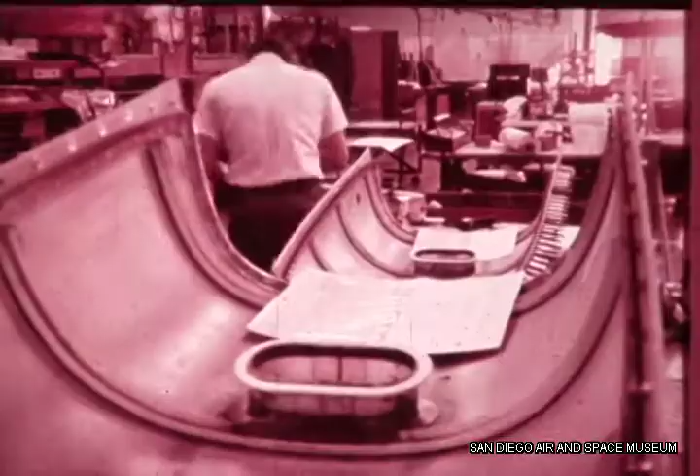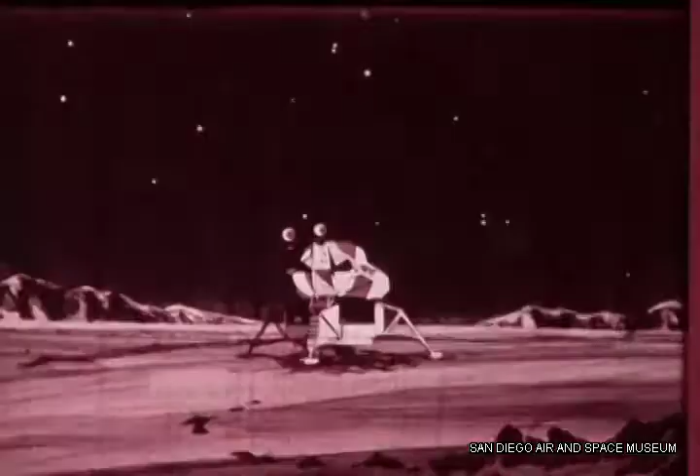Teledyne Ryan Aeronautical is a company of products, a company of aerospace firsts, Teledyne Ryan Aeronautical, a company of capability.

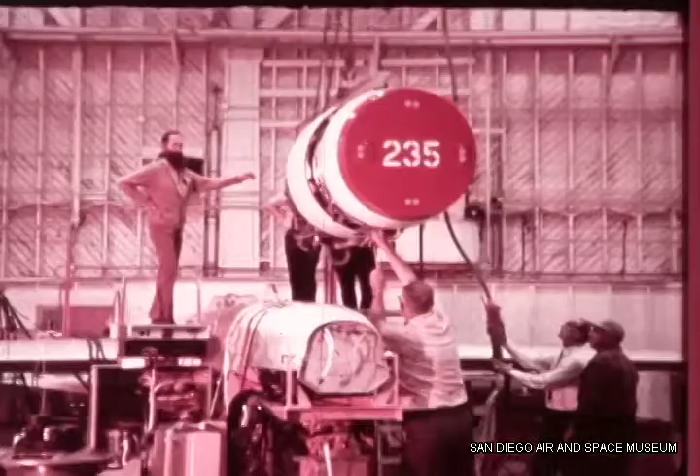The Teledyne Ryan Aeronautical main plant, located on a 44-acre site adjacent to San Diego International Airport, is headquarters for aeronautical engineering and design, with adjoining production facilities for prime or subcontract aerospace manufacturing.

In the early 20s, flight was still in its infancy when T. Claude Ryan founded the Ryan Aeronautical Company and later accepted the challenge of building Charles Lindbergh's Spirit of St. Louis, a great technological achievement in its day.

Throughout the following half-century of aerospace progress, Ryan became known for many firsts in the industry, such as vertical takeoff and landing jet aircraft, pilotless jet targets, and remotely piloted vehicles. In 1969, the company became Teledyne Ryan Aeronautical, a wholly owned subsidiary of Teledyne Industries of Los Angeles, California.

Teledyne Ryan's acknowledged leadership in unmanned aircraft technology was established more than 30 years ago with the Firebee-1 subsonic jet target. Firebee has proven itself to be a highly reliable aerial target for training the personnel of the free world's armed services and testing the sophisticated air-to-air and surface-to-air defensive equipment they man.

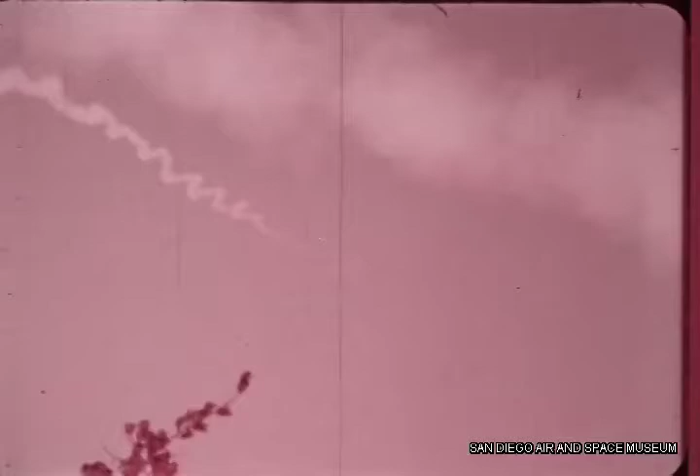To date, more than 6,000 Firebees have flown over 30,000 missions, with a mission reliability factor in excess of 92%. Firebee's performance envelope includes a maximum speed of Mach 0.97 in level flight, altitudes in excess of 18,000 meters, and a maximum endurance mark of nearly 2 hours in its standard configuration.

The target can be launched from sea or land-based stationary and mobile zero-length launchers. Firebee can also be air-launched for greater flexibility in conducting remote testing or training activities.

Firebee's highly modular design allows it to be adapted to a variety of missions, or to provide a wide spectrum of realistic target simulation through radar augmentation, chaff dispensing, and infrared augmentation.

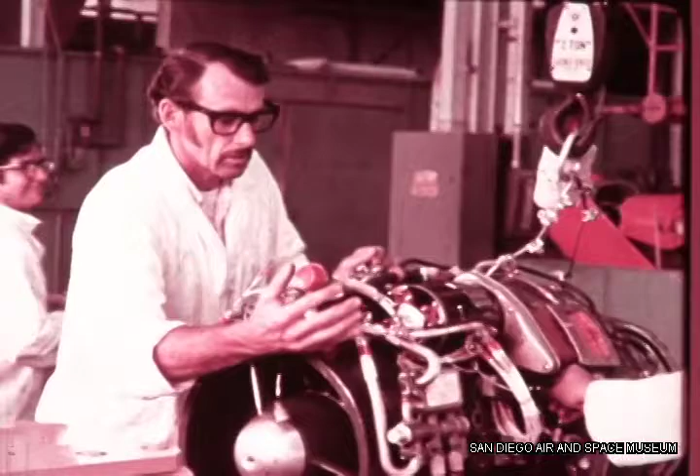The basic design has undergone various aerodynamic and structural modifications for up to an 8G turn capability. Although originally designed with a J69 engine, Firebee's performance capabilities have been enhanced by modifications that accommodate the more powerful J85 as well as other potential engine options.

Supersonic threat simulation approaching Mach 2 is the role of Firebee-2, the first of Teledyne Ryan's supersonic target vehicles. Longer, leaner, shorter winged than its predecessors, this high-performance jet target attains speeds, altitudes, and G maneuvers that put present-day weapon systems to the test.

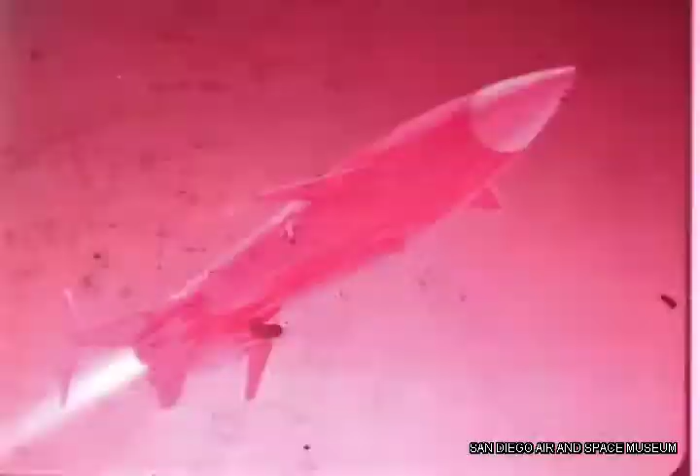The third member of Teledyne Ryan's supersonic target family is the Firebolt, which is being developed under prime contract for the Air Force's high-altitude, high-speed target program. Firebolt's small size, just over 5 meters in length, facilitates air launch from standard fighter aircraft.

Carried on the center store position of an F-4 Phantom, the Firebolt drops away at a typical mission launch speed of Mach 1.5 at 15,000 meters.

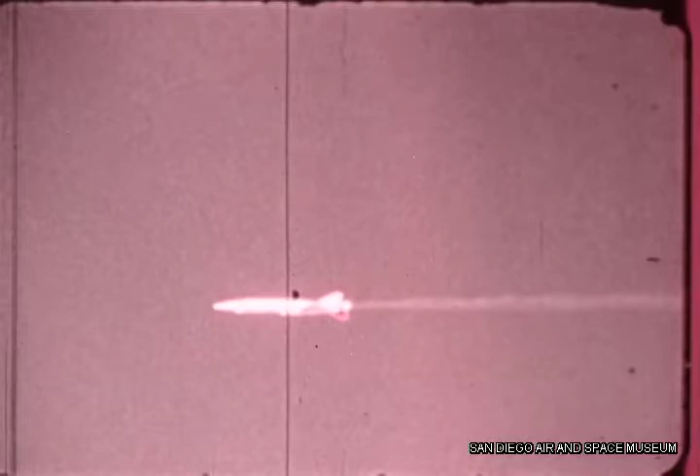An onboard automatic flight control system provides a highly maneuverable and versatile flight program, including constant Mach number and altitude cruise, constant G 180-degree and S-turns, as well as climbs and dives.

Firebolt's extraordinary performance, including speeds up to Mach 4 and operational ceiling of over 30,000 meters, provides a realistic replication of aircraft and missile threats for decades to come.

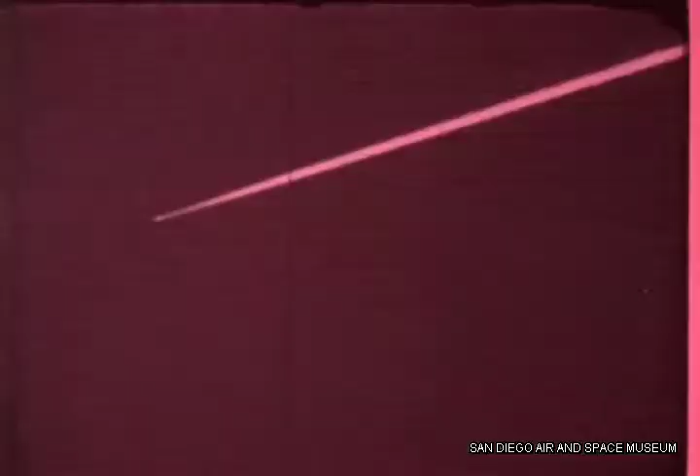With Firebee-1, Firebee-2, Firebrand, and Firebolt, Teledyne Ryan will be able to provide target vehicles that match the performance capabilities of any known airborne threat into the next century.

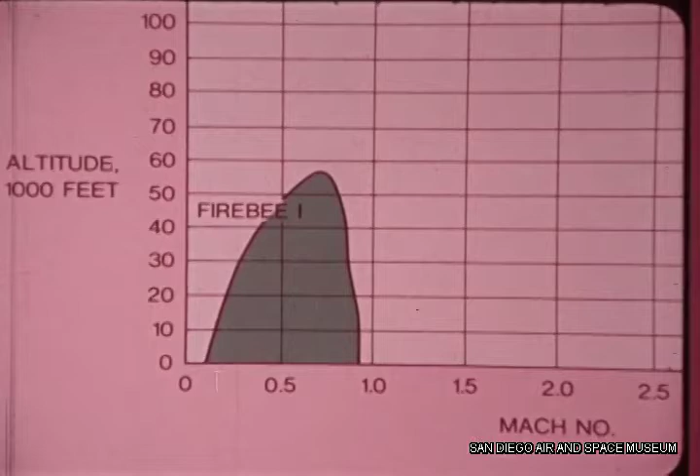Overlapping speed-altitude envelopes illustrate the wide range of these parameters, which will extend from subsonic flight at very low altitudes through the supersonic region at extremely high altitudes.

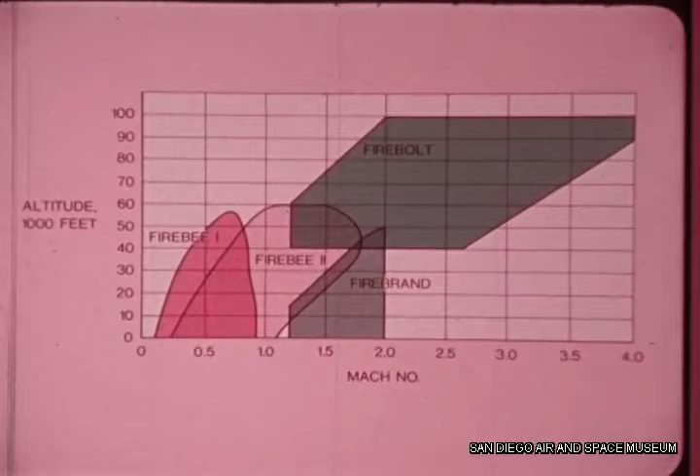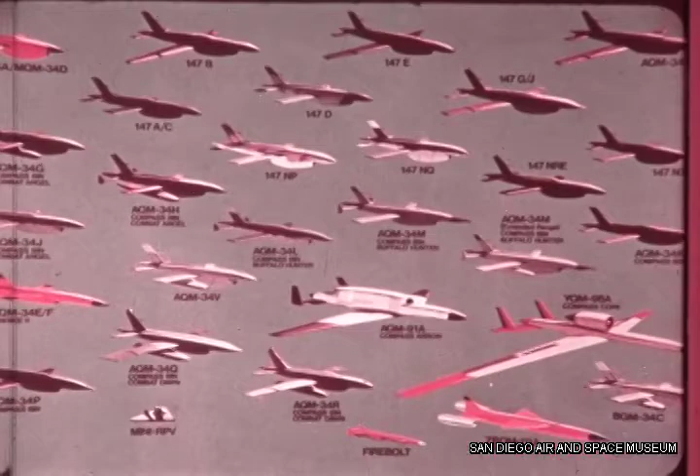In addition to its long history of jet target development, Teledyne Ryan has also designed and manufactured an entire family of remotely piloted vehicles, or RPVs. These robot aircraft are employed where conditions such as a hostile environment, very low or high altitude, or long endurance flight would be too expensive or too hazardous to include humans.

Since the early 1960s, over 900 RPVs in 30 different configurations have been developed to fulfill three basic mission requirements: photo reconnaissance in both day and night and at high or low altitudes, electronic countermeasures, including both passive and active systems, and radar and communication signal intelligence gathering.

These RPVs have also demonstrated the possibility of strike missions with the on-target delivery of the SPASM self-propelled air-to-surface munition, the stubby Hobos television-guided glide bomb, and Maverick television-guided missile.

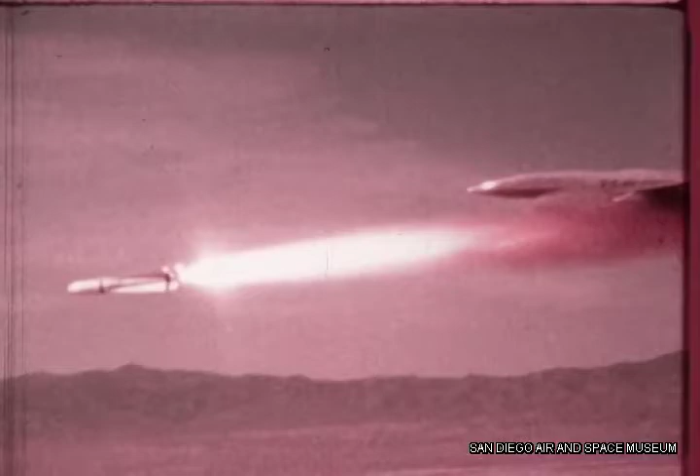Launched in the same manner as aerial targets and recovered by parachute with an airbag impact attenuation system, or retrieved in midair by helicopter, these RPVs provide the tactical commander with a versatile and flexible system that will allow him to dispatch a vehicle at short notice from almost anywhere.

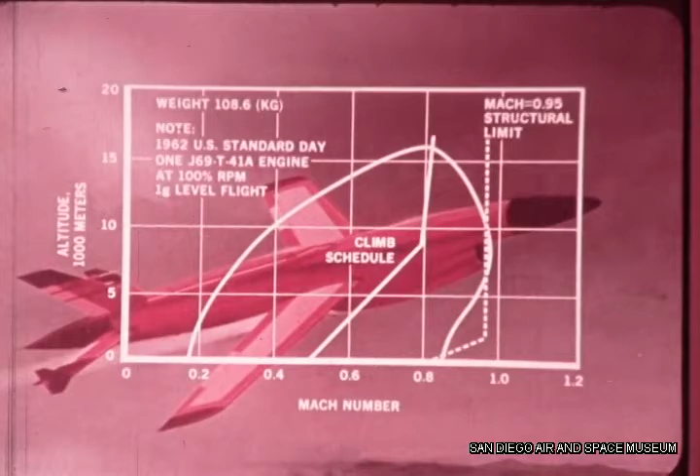The 124R is typical of the Teledyne Ryan RPVs, designed for photo reconnaissance at both low and medium altitudes under hostile conditions. Capable of flight as low as 50 meters and speeds up to Mach 0.95, the 124R has the maneuverability necessary to penetrate enemy defenses and the reliability to achieve its mission objectives consistently. Operating ranges extend from 800 kilometers at extremely low altitude to 3,000 kilometers on a maximum range mission. Interchangeable nose configurations can accommodate various high-resolution camera systems for low or medium altitude photo reconnaissance missions.

A prime example of Teledyne Ryan's design, engineering, and development ability is Compass Cope, an advanced state-of-the-art high-altitude, long-endurance RPV capable of runway takeoff and landing, either manually or automatically under onboard computer control by following tactical landing radar beam and radar altimeter data. It set the unofficial endurance record for RPVs in 1974, when it remained airborne for over 24 hours.

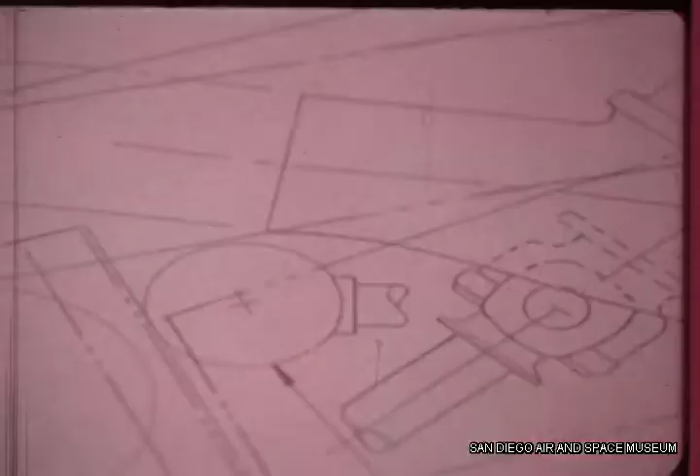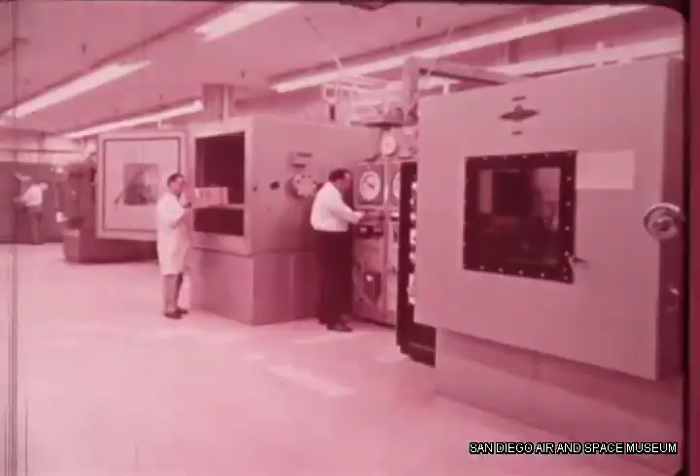Teledyne Ryan is well equipped to develop the next generation of RPVs with emerging mission requirements of speed, low and high altitude, short and long duration for both one-way and reusable systems. The company's staff of research, application, and design engineers are skilled and experienced in low and high altitude, subsonic and supersonic aerodynamics, propulsion, structure designs, and avionics integration, and are complemented by the necessary computer facilities, engineering test laboratories, and flight test and operational support expertise.

Their talent has been utilized on many programs to perform engineering studies, such as the development of flight control laws for the NASA HIMAT program through advanced flight control simulation, a kind of wind tunnel in the sky approach.

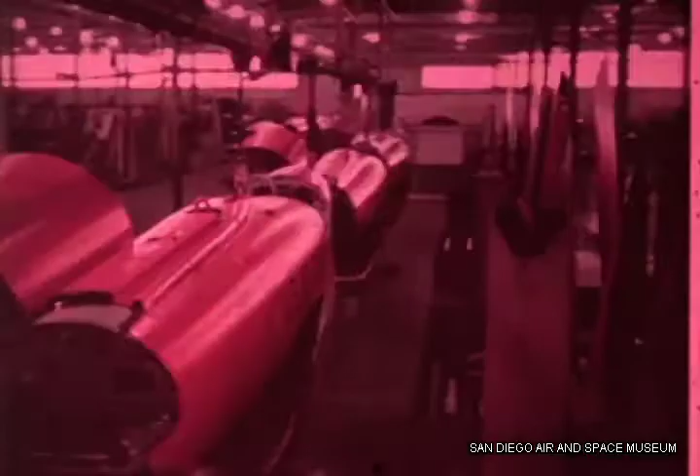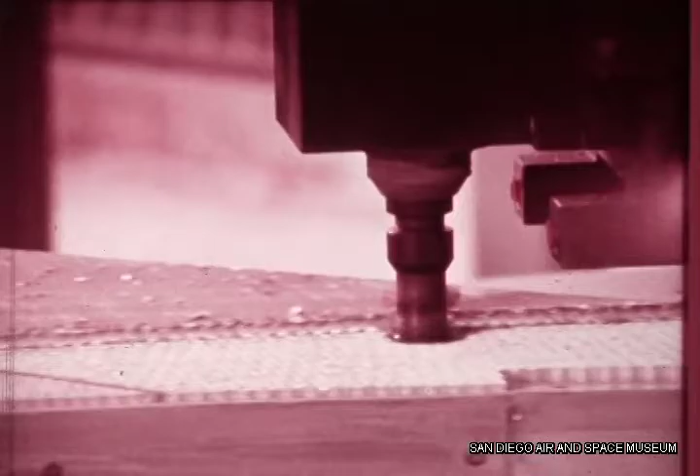The technologies of flight dynamics and simulation developed for the evaluation of such programs, Teledyne Ryan's role as an aeronautical manufacturer is a matter of record. Over the years, thousands of jet target aircraft and RPVs have been produced, and during its history, Teledyne Ryan has also been a subcontractor to each of the major airframe manufacturers, producing assemblies and components for aircraft such as Northrop's F-5 series and F-18 Hornet.

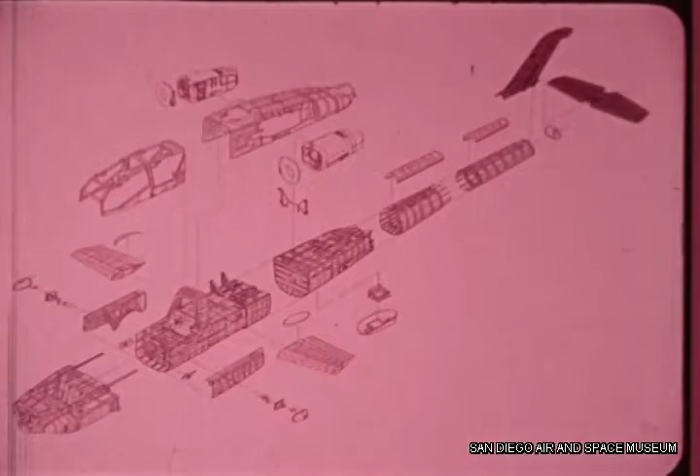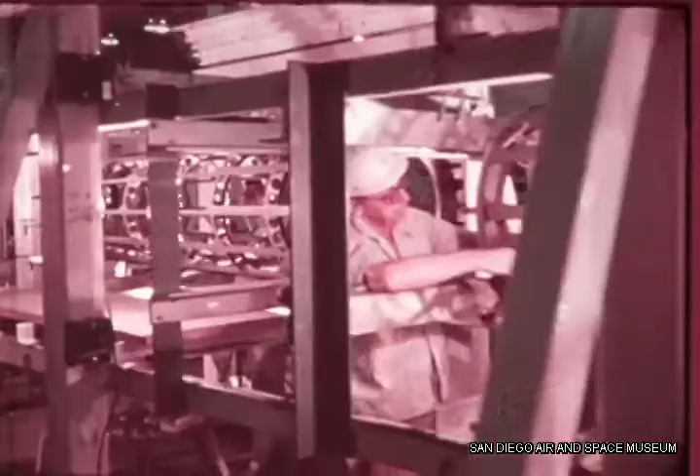As a team member of the Hughes Helicopters Company, Teledyne Ryan has the responsibility for manufacturing the airframe for the U.S. Army's Advanced Attack Helicopter, the AH-64. This major production subcontract includes the fuselage, empennage, wings, engine nacelles, avionics bays, and canopy structure for this rugged frontline gunship. Under the direction of Hughes Helicopters, Teledyne Ryan participated in the engineering design of the airframe and manufactured 8 sets of prototype airframe assemblies that were used during the development phases.

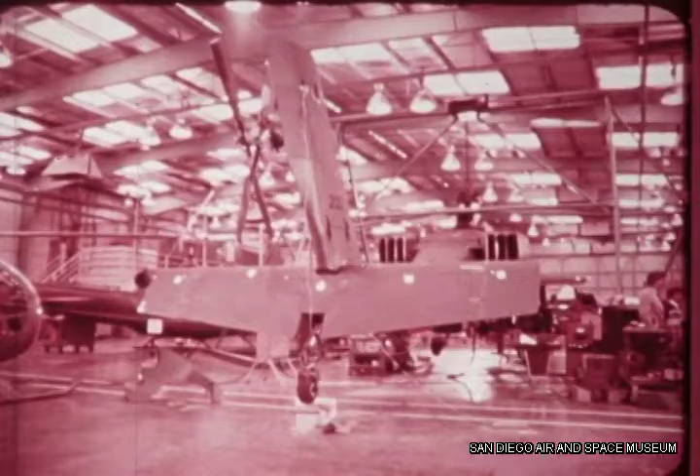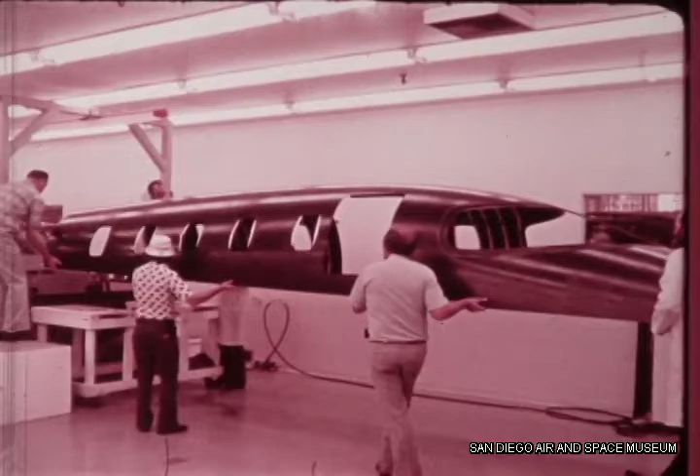While most of the aircraft is of conventional metallic construction, approximately 170 parts are made from a fibrous, reinforced advanced composite. The company has been a pioneer in the development and application of composite materials, including Kevlar and graphite epoxy, a technology called upon by Lear Avia in the manufacture of the prototype Lear Fan.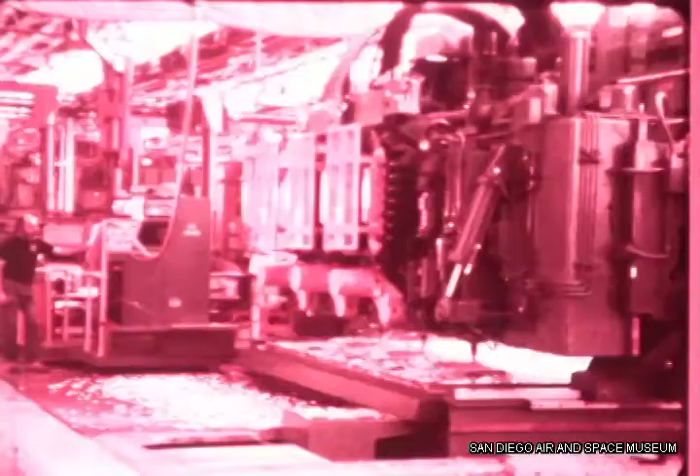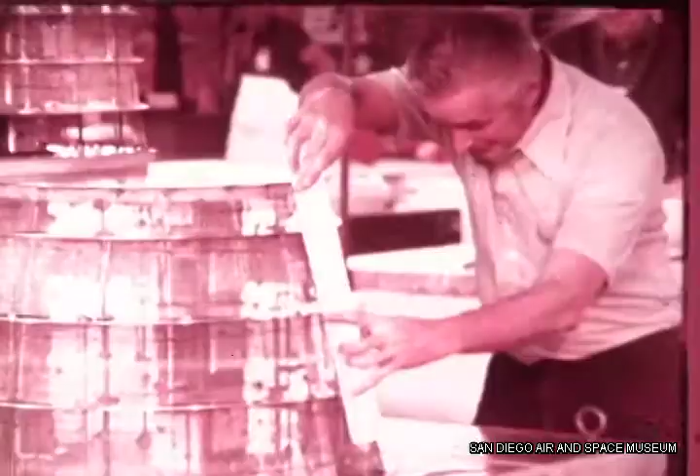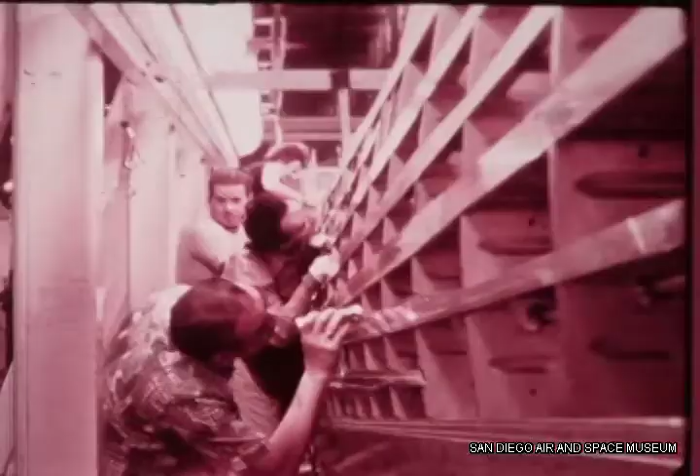Teledyne Ryan's manufacturing capabilities are one of the most comprehensive in the aerospace industry. Numerically controlled machining, as well as conventional machining, tool design and fabrication, welding and brazing, metal processing, metal forming, non-metallic fabrication and adhesive bonding, and assembly, all part of a total engineering, design, and manufacturing capability.

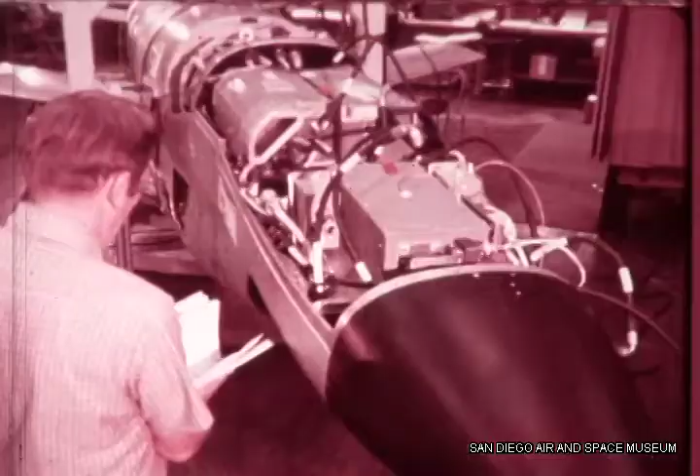Capability, however, is more than facilities, processes, and technological hardware. It's people. Human resources, nurtured and developed over more than a half-century of aerospace challenges. Teledyne Ryan Aeronautical is indeed a company of capabilities.